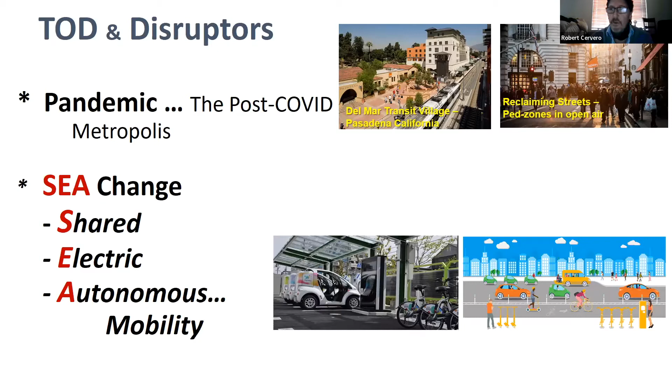And Thomas Kuhn sort of long quoted this idea, we only get significant change when there are these shocks to the system. And I think it's understood that collectively, these are a set of forces we're in the midst of that could bring about significant change. As it relates to disruptors, again, we're all aware of these, some are technological, some are sort of lifestyle shifts and megatrends. If you sort of break it down, some are working in favor of infill, compact city, and accordingly less travel in the sense of potentially less vehicle miles traveled per capita.

And included here, we would have things like e-commerce. We're substituting physical trips to shopping with parcel panel trucks delivering things via Amazon or whatever to our front doorsteps, or shared mobility. If we're sharing vehicles, and if we ever get to the stage of robo-taxis, we could obviously reduce parking and have a lot more of our land given over to infill development instead of surface parking spaces. We're aware of cities like Phoenix or Houston where it's claimed 30–35% of land area is just for surface parking. So all of those could work in favor of a compact, potentially less car dependent urban landscape.

But there's also a set of forces we're in the midst of that are working for decentralization and more travel in the form of more vehicle miles traveled per capita. And included here, I certainly would be automated autonomous vehicles. All of these are basically ratcheting up the efficiency of private mobility, and accordingly, we would expect the structural response to be a deconcentration of urban growth. But I would even include electric vehicles. What electric vehicles in certain ways do is remove carbon from the table of the reasons why we want to promote sustainable mobility, be it public transit or cycling or whatever.

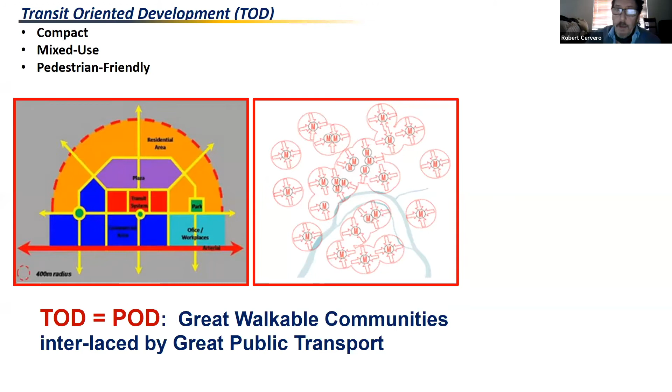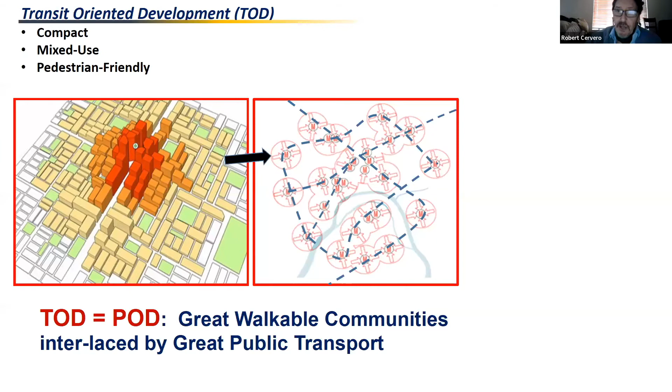But the way I choose to think about TOD as a conceptual basis for advancing sustainable urban growth is it's pedestrian oriented. The notion of TOD long has been this idea of great walkable communities where within a 5-minute pedshed, so to speak, of a station or a major bus stop or depot, a lot of activities can be reached within 5 minutes. So this idea of mixed use, walkable development huddled around transit, and then interconnecting these PODs, pedestrian oriented nodes, with great world-class electric trains of some kind. So that's the core notion of TOD, these ped sheds. And the transit metropolis idea is that through good planning and design, we interconnect them by world-class public transit.

Well, I'm going to focus most of my comments here on the post-COVID world. The future of TOD very much lies with the future of transit. Successful transit is absolutely essential to TOD, and I think we're all aware transit faces a number of headwinds in light of COVID. Virtually every American system has seen a dramatic decline in ridership from the pre-pandemic level, despite federal subsidies, even big cities with a long tradition of transit: New York, San Francisco, Chicago, and so forth.

And I think we're aware why. By the way, I want to emphasize that where we've seen this dramatic drop in transit is where you have significant service, knowledge-based economies, a lot of college-educated workers. If you go to a place like Dhaka, Bangladesh, or parts of Latin America and South Asia, transit is pretty much back to former levels, if not even higher. It's in areas where a significant part of the workforce can work remotely that we've seen this big decline.

Obviously the avoidance of crowded public spaces is hurting transit in light of COVID. There's the increase in crime, partly tied to some of the homeless and social problems we face in our cities. But the other reality is we have a lot more mobility options, be it ride-hail services or bike sharing. Collectively, this has really cut transit ridership significantly, and that's going to unavoidably hurt the potential of TOD. Most of the decline in ridership has been choice travelers, people with cars who have the alternative of either not working or driving.

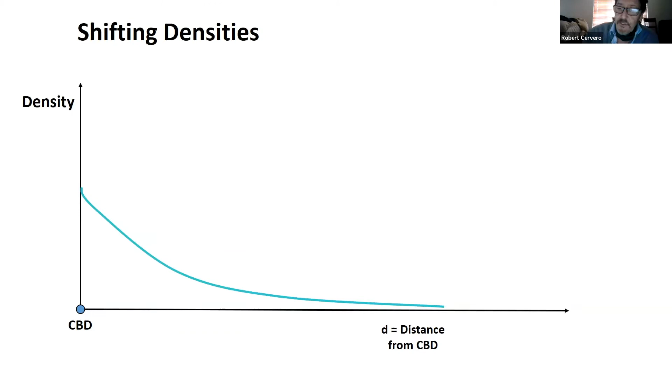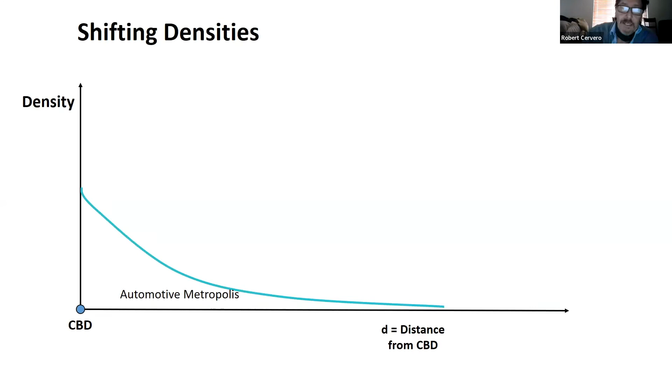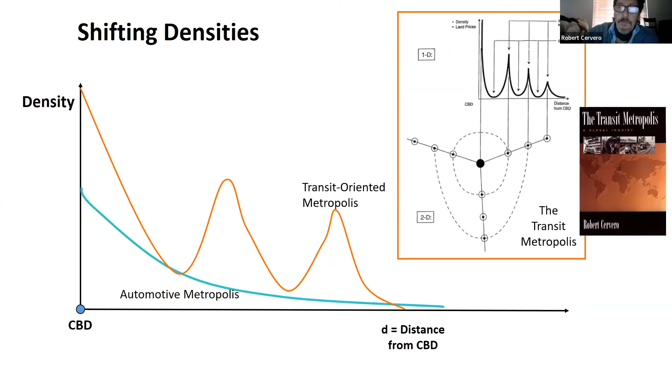But what we're seeing in the post-COVID metropolis, I believe, is this further flattening of the density gradient, but less peaking as well. In the central business district, we have empty downtown office buildings, and unless we convert this to housing, which some places are doing, we're going to see a de-densification of our CBDs, but also potentially the subcenters, and that's less dense subcenters.

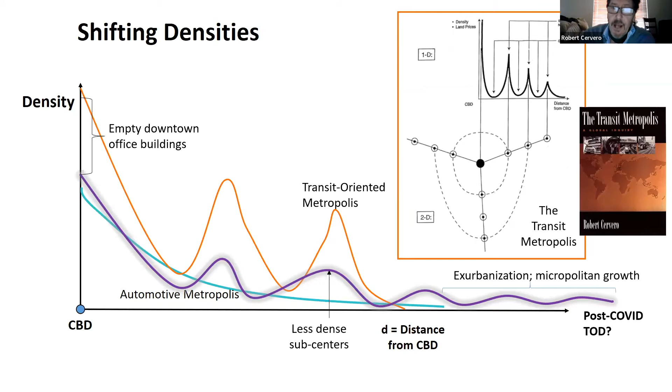And then this exurban micropolitan development. The statistics I last saw suggest that exurban micropolitan growth is 30 to 40% faster right now than urban growth in the last several years. So what this really means in terms of this reshaping of the metropolis, less towards traditional and transit-oriented development.

And by the way, I just wanted to point out that historically we think that the agglomeration benefits and proximity benefits of being near a train station or BRT station get capitalized into land values. This is kind of a graph from one of my books. And that has long formed the basis of the idea of value capture and transit joint development.

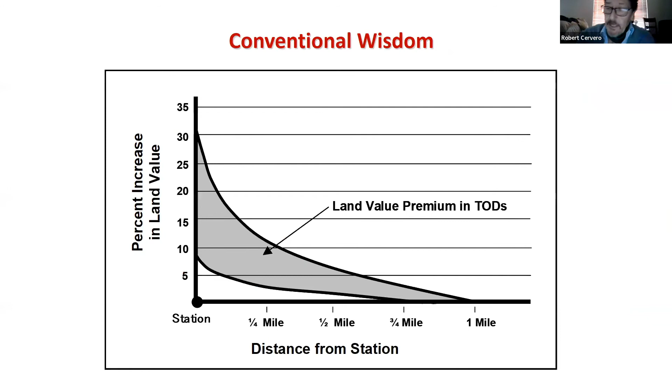But if there is less of a value towards densification and agglomeration and proximity to transit, it will get reflected in real estate values. And I think anecdotally, we're beginning to see that. But in terms of this de-densification of subcenters and micropolitan exurban development, I am firmly convinced that the TOD increasingly is going to be this kind of transit village profile.

I don't want to sound too much auto-promotional here, but I did co-author a book in 1997 with Mike Bernick called Transit Villages in the 21st Century. And it very much was about, instead of these Le Corbusier towers in the park, 10 to 15 story structures that you might see in Toronto or some big cities, making the argument that the mixed-use village kind of environment within 5-minute ped sheds is better suited for a lot of American settings.

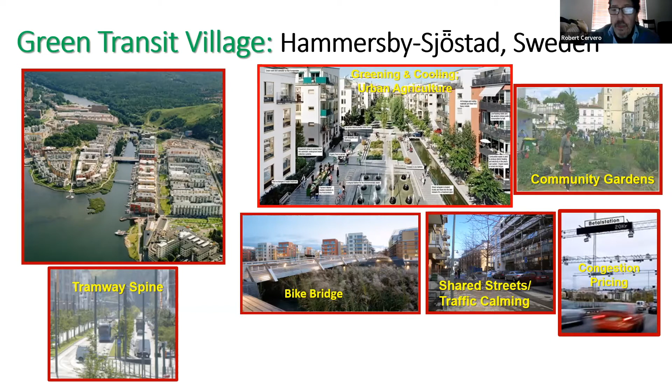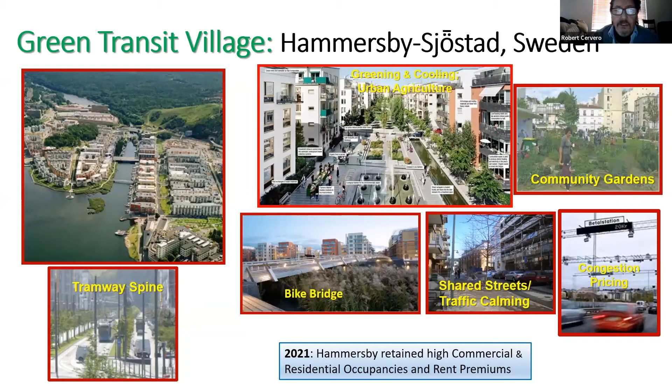But this project, I contacted some friends a few months back from KTH, and they don't really have necessarily firm statistics on it, but it's understood that this is not in the core of Stockholm, but fairly close to the center. It's close to a congestion pricing zone, but it's retained pretty high commercial residential occupancy rates and rent premium. So, I think these kind of village type profiles of transit are the future in light of the trends I've just noted.

Now, this is kind of an aspirational vision in the sense that if indeed what we're seeing is this deconcentration of our cities, less of a monocentric urbanization pattern where the dominant share of workforces and office buildings are downtown, towards these multi-centric, multi-centered kind of metropolis, it really creates an opportunity at a mega regional scale. And I think this is part of the problem.

Our long-range planning typically occurs through MPOs, which are in certain ways anachronisms in light of the exurban micropolitan development we're seeing. But if we had the capacity to do these mega regional planning things, in 20 years, maybe we could begin to create these mega regional networks of electric mobility between the subcenters and micro mobility, sustainable shared mobility within the subcenters.

And if you do this well, classically, this would be the benefits of having multi-directional travel flows. The curse of a predominantly monocentric metropolis is that everything flows through the central business district in the morning, and buses and trains are backhauling half empty in the peak hours. You get much more balanced travel flows with this kind of multi-centered metropolis. But again, electric vehicles and electric fast trains between the centers with HOT lanes and proper pricing, and then shared micro mobility and walking and cycling and so forth within the centers.

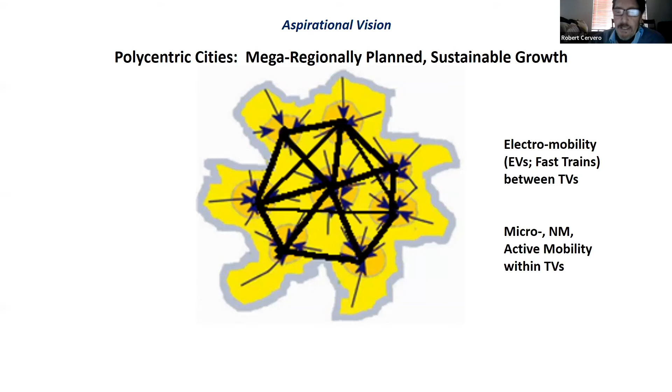And I think what is helping maybe bring this along, virtually every global metropolis I'm aware of now has embraced this idea of the 15-minute city. First, I guess it was Mayor Hidalgo from Paris that gets a lot of the credit, but I think we're all familiar with this idea. But this is kind of a public policy reframing that I think can further usher in this kind of vision I just outlined.

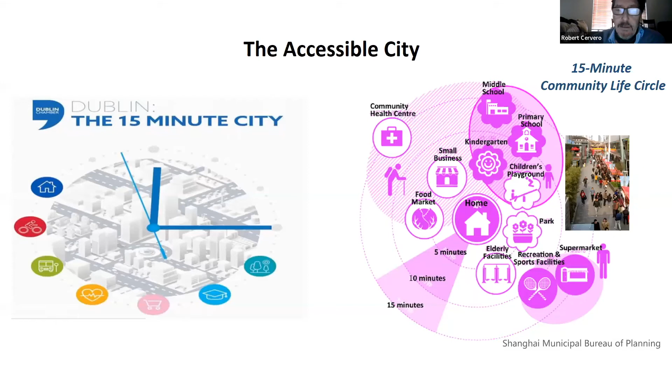But it's this very notion where 60 to 70% of everyday activities, gym, meeting a friend over coffee, going to the local grocery store, takes place within your transit village or accessible community, and the 30% of trips that you need to, say, get to work or go to regional shopping or a sports facility takes place by train. But anyway, that accessible city idea is, I think, helping to bring potentially this kind of form of suburban growth.

But I think also working in favor is the trend towards micro shared mobility. Again, this is kind of a lifestyle shift. Mobility as a service is a wonderful idea. Maybe it hasn't caught on as quickly as a lot of us were hoping, but you subscribe and mobility becomes a conveyance. And the key idea is that you get right sizing, the right vehicle for the right trip. You don't need a turbocharged 2-ton cage to shuttle around a neighborhood to do light shopping and so forth. But also, it's not just sharing vehicles, sharing seats, things like Uber Pool and so forth.

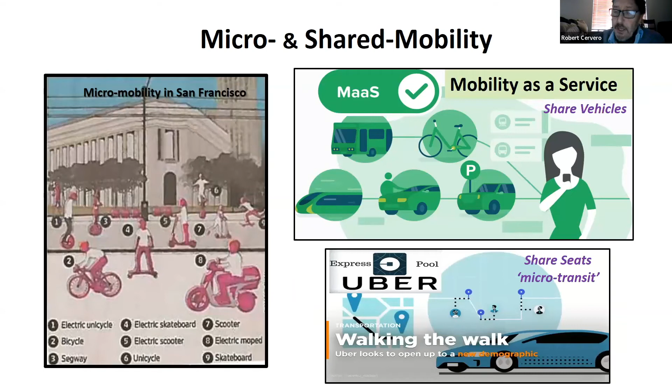So what this does potentially, in my view, is move us towards, instead of the TOD idea of a 5-minute ped shed, a 15-minute shared mobility, kind of micro mobility shed that is brought about through this focus on the accessible city. There are potential cost savings from this.

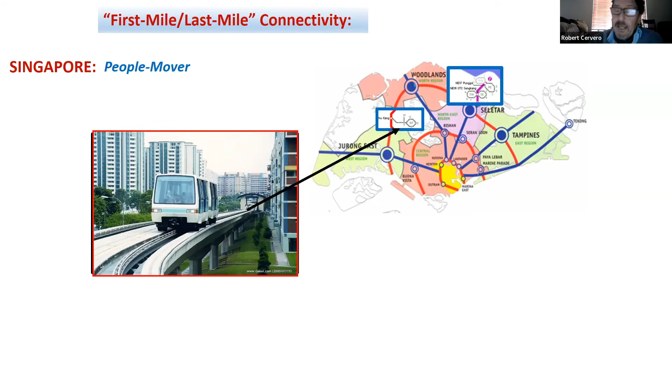Take a city like Singapore, and I know a lot of folks at MIT have long been involved in Singapore. Singapore has long been one of my models of a transit metropolis, a wonderfully master planned metropolis, and it's certainly got transit-oriented development historically. But if you get out to the suburbs of Singapore, they long have relied on these automated driverless electric trains to provide that first mile connectivity. They are now trying to replace that with something much more economical.

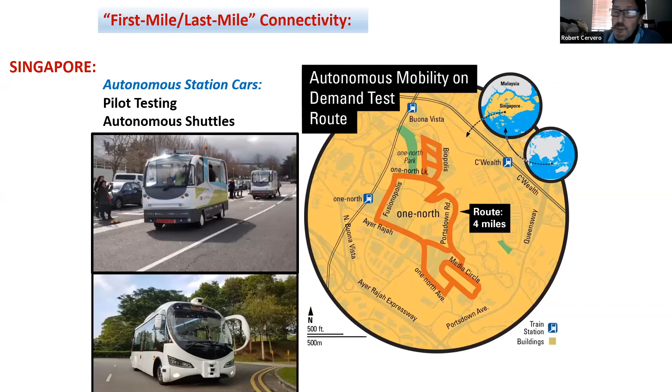Instead of separate guideways and the very high cost of elevated automated train structures, you just get autonomous electric shuttles to basically achieve that same first last mile connectivity, allowing this vision of a 15-minute city. In Singapore's case, they define it as a 20-minute town for these 60 to 70% of activities that occur locally in the community, and a 45-minute city to get to work or to regional shopping or to, say, some major sports or concert event.

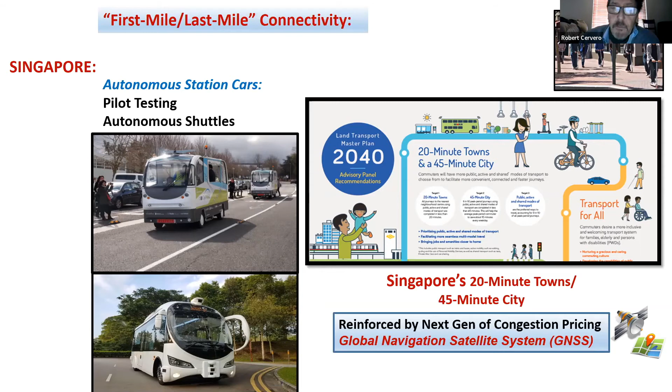And of course, in Singapore, they've long done congestion pricing, though it's been this kind of klutzy cordon-based pricing. They're advancing this global navigation satellite system where they can do true dynamic pricing, where you real-time adjust the price based on congestion levels, where and when you drive. Anyway, because of technology and this vision, I think they're advancing this sustainable transit metropolis, though on a different scale than originally envisioned. I just want to briefly mention autonomous or automated vehicles.

To me, what could work in favor of this vision as much as anything is the fact that through robotics you can drive these vehicles very precisely. So instead of this classical 11, 12-foot wide lane, we could shrink lanes down to 7 or 8 feet, free up a lot of real estate. We've had overly crowded sidewalks in a lot of settings in this post-COVID period, but we could also begin to achieve some kind of true complete street where we have dedicated infrastructure for bikes and electric bikes and walking and all forms of micromobility.

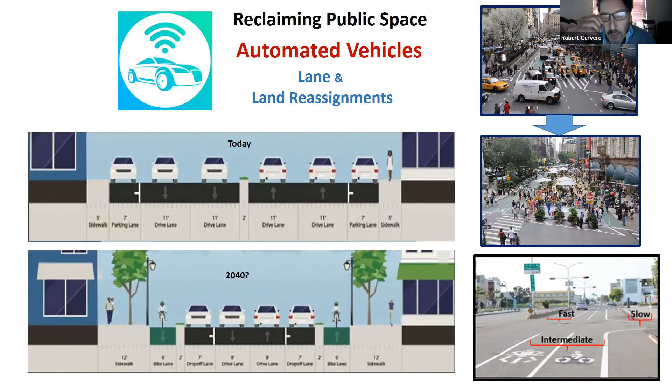And I put this image on the very bottom right side. We have a notion in the US of streetscapes of dichotomizing it. Either it's a motorized lane or it's a non-motorized lane. Well, we're getting so much variation in speeds and exposure levels of weight to speed ratios that this idea of tertiary, even some kind of more refined dedication of space for electric bikes or regular pedal bikes or pedestrians versus moving cars. So we have all these possibilities, again, in light of this 15-minute accessible city notion.

I just wanted to close briefly on parking. If we are to get this marriage of shared mobility and autonomous mobility, which would mean pretty much these robo-taxis, I think we all recognize that would dramatically reduce the demand for parking. And we could plausibly convert parking structures to things like housing units. The key word here is obviously future proofing. We don't want to be building parking structures now which make this conversion difficult in the next 15 to 20 years, including in the transit village environment.

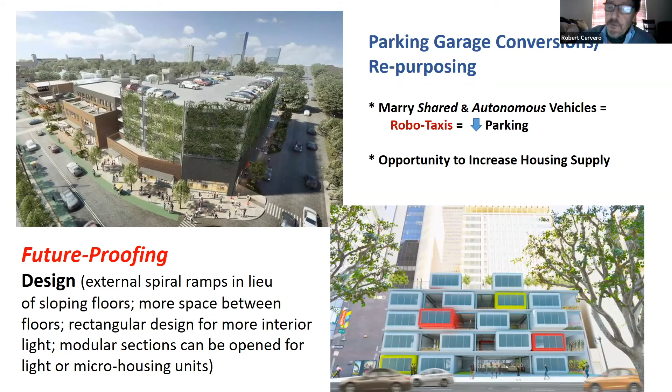So what that means is instead of sloping floor structures, you have spiral ramps on the exterior. Instead of square designs where the interior is dark, you have rectangular designs where light can get into the interior. You can plausibly have housing. Instead of 8 to 9 foot ceilings, you have 12-foot ceilings where you can put in ventilation ducts and heating systems. So this conversion possibility, future-proofing our design, could help bring about these changes. But what's critically important is that we put in place now the kinds of design building codes that allow this future-proofing of our design.

And BART, the Bay Area Rapid Transit, has long been trying to convert surface parking to housing, and they've indeed done it, replacing it with much more expensive structured parking. And it's been triggered somewhat by this shared mobility and lifestyle shift, the demand for affordable housing. But what we're seeing now is because of the dramatic declines in ridership, a lot of surface parking lots are virtually empty.

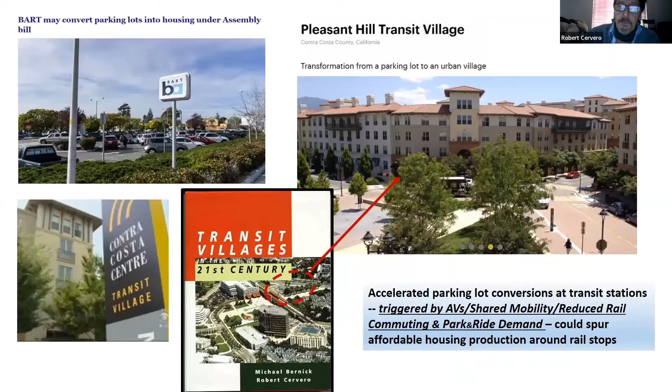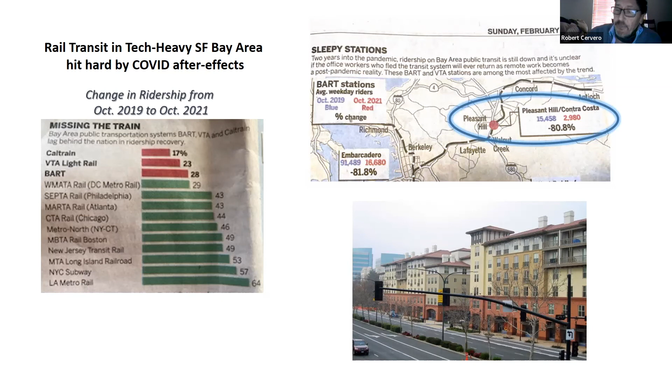And what I'm showing here on this graph is sleepy stations. The Pleasant Hill BART station that, again, was highlighted in this book on transit villages has had an 80% decline in ridership, despite the fact that we put all this housing at the transit station, simply because many people living here are not going to work anymore at office developments. They're working out of their apartments or at a coffee house nearby. But the reality is that this project is still very successful. It's at like 98% occupancy. It's pretty much occupied.

It still has a very high rent premium, and it's the fact that people still want these mixed-use walkable developments that this was planned as part of a master plan transit village. So, I think there's a lot of potential for transit villages in the sense that we have all these empty surface parking lots off the rail networks, and a lot of them have good access to freeways that represent pre-assembled large swaths of real estate that you can infill and put housing projects in.

Now, the reality is proximity to transit perhaps is more a secondary factor. It's not the fact that it's focused on transit that's the big selling point. It's the fact that you can probably build housing easier on these underutilized surface parking lots than pretty much any place in the suburbs and the exurbs, and still create the opportunity to occasionally use transit, maybe not on a regular basis, but even if you go to the office 1 or 2 days a week, you have that option.

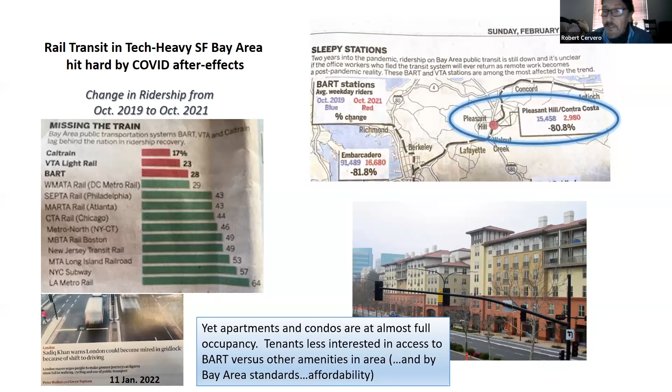And I actually used data from this Pleasant Hill BART station I just showed, where surveys in 2003, for instance, showed 45% of the people living within a half a mile of the Pleasant Hill BART station were taking BART to work, the rail system. Within the donut, 1/2 to 3 miles away, it was only 14%. And within the larger city of Pleasant Hill, beyond 3 miles, it was only 8%. So clearly, there was sorting going on. People were buying into housing and renting housing near the transit stops for the very reason they wanted good access to workplace. Well, clearly, I don't think that's the future.

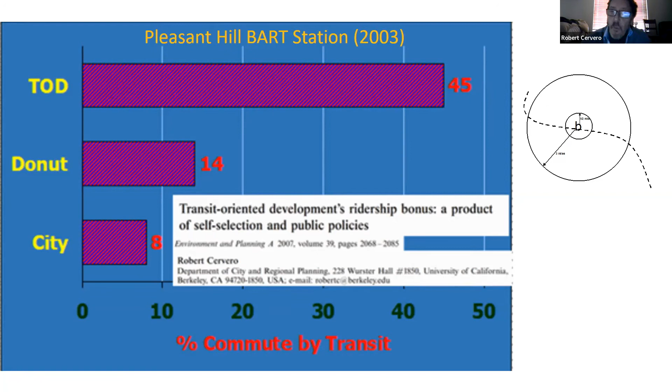I think self-selection is probably going to dramatically decline as a motivator to live near transit. It's going to be the fact that more people are drawn still to, in suburban, exurban settings, good quality master plan, mixed use, walkable communities. And transit itself will become of secondary importance.

My very last slide, I take a little time. Everything I've talked about here is mainly from a US perspective, but it's essential that when we think about the future of our cities and things like TOD, that we not lose sight of the fact that, on a global scale, we have to think globally increasingly if we're concerned about things like carbon and the future of our planet. 80 to 90% of our urban population growth is going to be in the global south. It's not going to be in the US and Europe. And the challenges are fundamentally different.

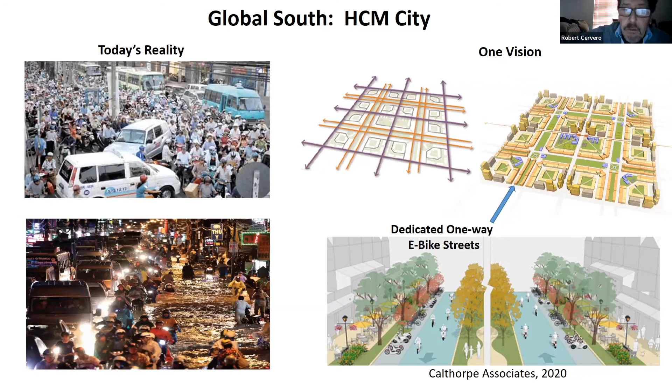This happens to be Ho Chi Minh City. And I bring it up in the sense that this is a project from the World Bank that I worked on with Peter Calthorpe Associates, based in Berkeley. And as some of you might know, Peter Calthorpe is credited with having coined the term TOD. He wrote a famous book in 1993 on this. And so Peter and I were jointly brought in to help promote TOD around a bus rapid transit system in Ho Chi Minh City, as well as the planned rail network. And we said, of course, we'll try to do it.

But the reality is over 90% of the trips are in mopeds and motorcycles. And you can see it's a coastal city that floods a lot because of rising sea levels. The challenges are so fundamentally different in a context like this than everything I've just outlined. And even though we came up with some TOD design ideas for the BRT network, what we really argued for was there's a plan for a master plan new town, over 1 million people, upland north of the city where you have currently a greenfield, coming up with this idea of a dedicated one-way network of electric bikes where you would have great separation between motorized vehicles on this grid, and then separation for safety reasons in part of electric scooters and mopeds.

And hopefully these would be from renewable energy sources; if electricity is coming from coal-fired power plants, it's not going to do a lot to decarbonize the cities. But if we can really advance sustainable electricity production... but the reality is most of the population are Gen Zs, people born since 1997. They've been reared on mopeds and motorcycles, and they're simply not going to shift to public transit. So let's design for sustainable private, maybe some shared mobility with motorcycle taxis, but nonetheless, really downplaying TOD in this very context for the very reasons I outlined.